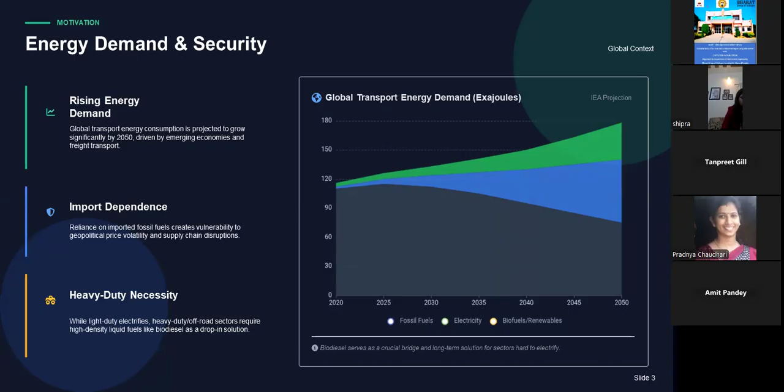So here we have a graph which clearly shows the energy demand. Rising energy demand: global transport energy consumption is projected to grow significantly by 2050, driven by emerging economies and freight and transport. Import dependence: reliance on imported fossil fuels creates vulnerability to geopolitical price volatility and supply chain disruption. Heavy duty necessity: while light duty electrifies, heavy duty and off road sectors require high density liquid fuels like biodiesel as a drop-in solution.

So, resource depletion. Here we are discussing a few flaws with diesel: finite fossil reserves. Conventional petroleum reserves are finite and geographically concentrated, creating long-term supply instability risk. So as the demand and requirement increase, we have a risk that the long-term supply will not be available for this fuel.

Feedstock diversification: the ability to utilize diverse biomass sources like waste oil, animal fat, and non-edible crops like jatropha and camelina. Rural development and value chains: localized production supports agricultural economies, creates jobs, and reduces dependence on foreign energy imports.

So we have a few points regarding air quality and climate. Here we have a graph that clearly shows that biodiesel produces less pollution compared to petroleum diesel.

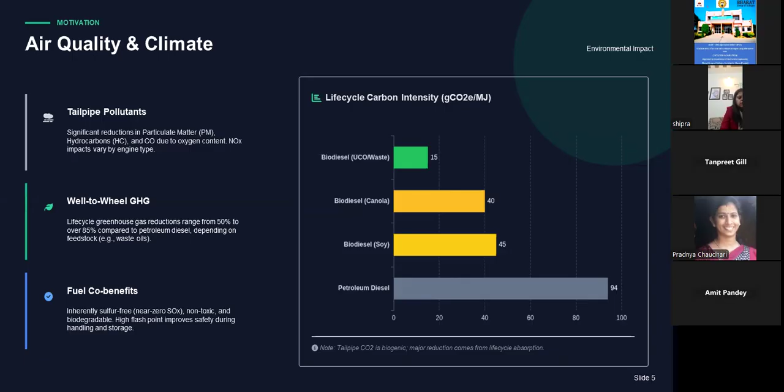So let us discuss petroleum diesel. Petroleum diesel is a fossil-derived mixture of hydrocarbons, primarily paraffins, cycloalkanes, and aromatics, and contains no oxygen. Biodiesel, fatty acid methyl ester, is produced via transesterification, an oxygenated fuel strictly defined by standard ASTM

D6751 or EN 14214. So here one thing we have to discuss is the process of transesterification, where fatty acid methyl esters are produced when alcohol is reacted with edible or non-edible oils. We have some conditions that we will discuss later.

Also, biodiesel has oxygen, which is very useful as it is an oxygenated fuel, helping to combust carbon monoxide completely and convert it into carbon dioxide, which reduces pollution. Renewable diesel, HVO, hydrotreated vegetable oil, is a distinct paraffinic fuel chemically similar to petroleum diesel, not FAME, that is biodiesel, often called green diesel.

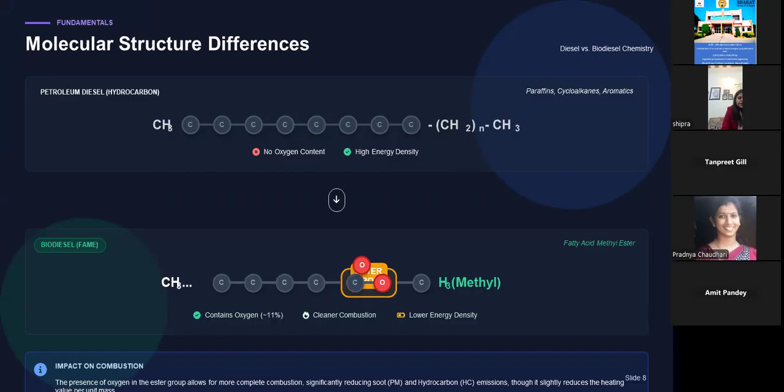So here is the molecular structure for petroleum diesel and biodiesel. Biodiesel contains oxygen, and this extra oxygen will help to reduce the pollution. Here we can see that biodiesel has many significant differences, for example viscosity. Diesel has 2.0 to 4.5 and biodiesel has 3.5 to 6. That is higher than diesel, right?

If we talk about cetane number, the greater the cetane number, the easier the ignition. So we can say it has a better cetane number also. Diesel has 40 to 55, but biodiesel has 47 to 65, which is quite better. It also improves ignition quality. So these are some properties that we can compare.

And the most important thing we can discuss here is oxygen content, which is zero in diesel and near about 11% here, which makes it cleaner. Biodiesel has 11% oxygen, which makes it a cleaner fuel. It also helps complete combustion so that the residue converts into carbon dioxide rather than carbon monoxide.

Also, biodiesel doesn't have any sulfur, so we can say it is sulfur free. It will help to negate SOx emission, sulfur oxides emission. So that makes it a better option for a fuel. So here we are going to discuss feedstocks and production. The production will also explain the process of transesterification that I discussed earlier.

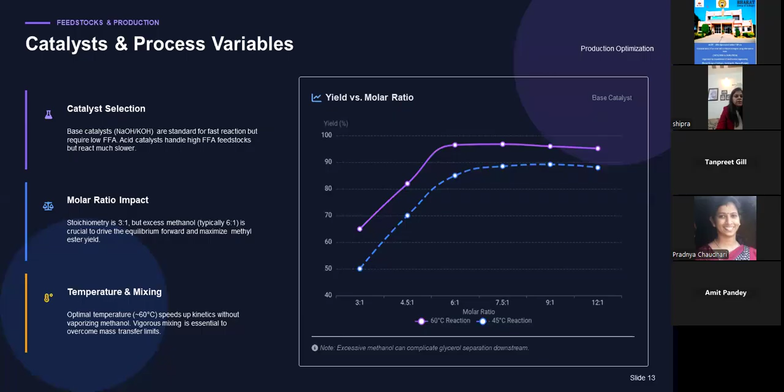Catalysts are required for the process. Base catalysts, sodium hydroxide or potassium hydroxide, are standard for fast reaction but require low FFA. Acid catalysts handle high FFA feedstock but react much slower. Molar ratio, temperature and mixing have an impact. The temperature required is 60 degrees Celsius for this reaction. We get byproducts, and we have to manage these products and quality control.

So byproduct management consists of glycerol separation, which is a must from the biodiesel we get from transesterification. It should be removed, as greater than 98% purity is required. Crude glycerol often contains methanol and soaps. Soap formation, caused by free fatty acids reacting with the base catalyst, must be split or washed out. So this is the basic process required.

Methanol recovery is also required here. Excess methanol is distilled and recycled to improve the economics. Next we have the purification process. Wet washing uses water to remove soap, catalyst and glycerol, and generates wastewater. Dry washing uses ion exchange resin or adsorbent and reduces water use.

Polishing is final filtration to remove micron-scale particulates and moisture. Quality assurance: ASTM D6751 or EN 14214 are the standards for biodiesel, strict specifications the final fuel must meet before blending. Reaction completion is measured by total glycerin, mono-, di- and triglycerides remaining, and a flashpoint check ensures methanol has been adequately removed.

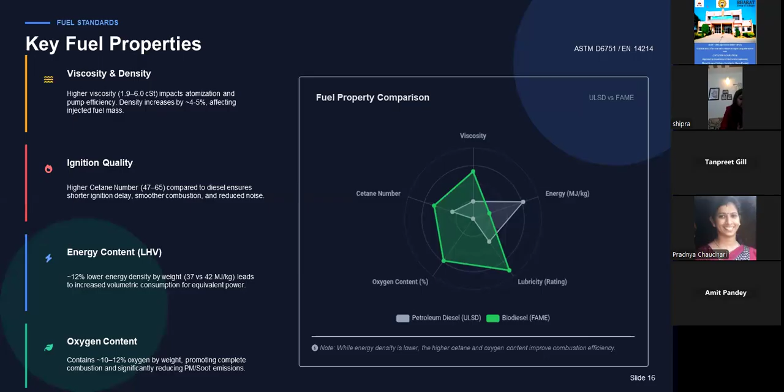We have a few important parameters, including free glycerin, water content, acid number, metals like sodium, potassium, calcium, and oxidation stability. Poor quality biodiesel can cause injector deposits, filter clogging, DPF ash accumulation, or warranty voids also. Biodiesels and handling we are going to discuss.

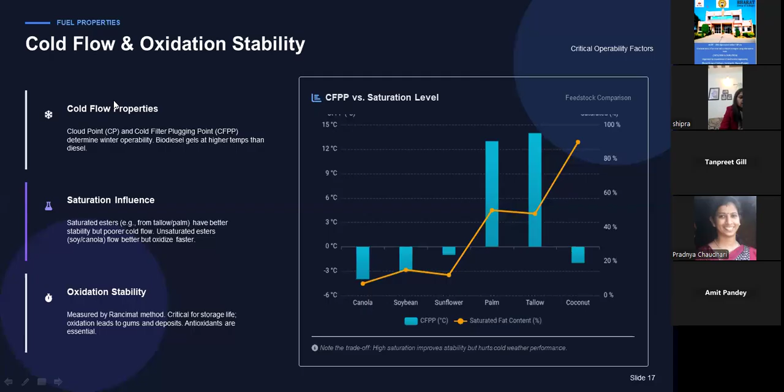So here in this slide we can see cold flow properties, that is cloud point, CP, and cold filter plugging point, CFPP, which determine winter operability. Biodiesels gel at higher temperatures than diesels. Saturation influence: saturated esters have better stability but poor cold flow. Unsaturated esters like soya or canola flow better but oxidize faster, which is again an issue to discuss. Oxidation stability is measured by the Rancimat method, which is critical for storage life. Oxidation leads to gums and deposits. Antioxidants are essential.

So we have a few standards. Let us discuss first pure biodiesel, that is B100. That standard is ASTM D6751, USA or Canada. It applies to pure B100 prior to blending and focuses on the physical properties and contaminant limits. Second is EN 14214; Europe is using the FAME standards, stricter on oxidation stability and iodine value, which limits some feedstocks. Here in India, IS 15607, national standards adapted for local feedstocks like Jatropha and Karanja.

So we have critical differences: iodine value, EN 14214 caps at 120, ASTM has no limit; and cetane number, EN requires minimum 51 and ASTM requires minimum 47. Blend specifications are also discussed here. ASTM D975 standard diesel allows up to B5, 5% biodiesel, as a generic component, while ASTM D7467 covers blends from B6 to B20, crucial for fleets using higher blends. EN 590, the EU automotive diesel standard, caps FAME content strictly at 7%, that is B7.

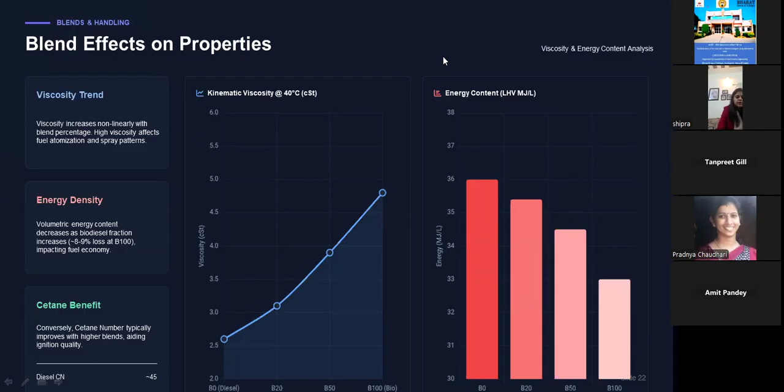Storage and handling. Also, we have to consider that biodiesel absorbs moisture easily. It has limited storage life, that is, we can use it for 6 months only, and it cleans old diesel deposits from tanks. So these are major issues that we have to consider. Proper storage practice includes keeping the fuel dry, avoiding copper and brass, using antioxidants, and regular filter checks, which is very important to keep in mind when using biodiesel.

So now we are going to discuss engine performance. This graph completely describes all the properties and also compares the trends. BSFC, that is brake specific fuel consumption, increases with biodiesels because of lower heating value. For B100, BSFC may increase by 10 to 13%. BTE, that is brake thermal efficiency, remains nearly the same or slightly improves due to better combustion.

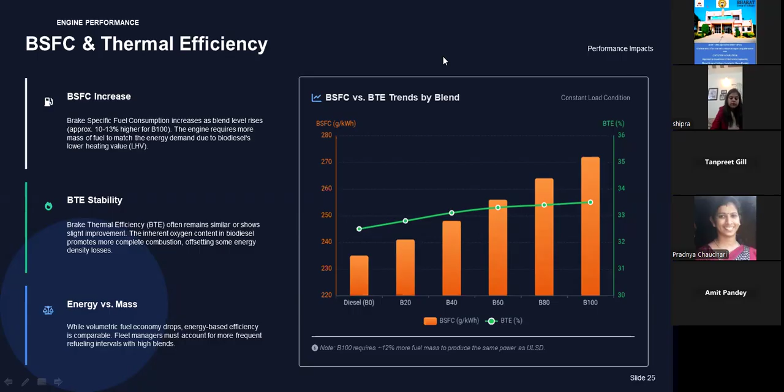So here we are discussing power and torque outputs. Energy content drops. Biodiesel has 10 to 12% lower heating value (LHV) than diesel. That theoretically reduces the peak power if fuel volume is constant. Density compensation: higher density results in greater injected mass per stroke. Net performance impact: B20 typically shows negligible loss, that is less than 2%. B100 may show 5 to 8% reduction in max torque or power without any recalibration.

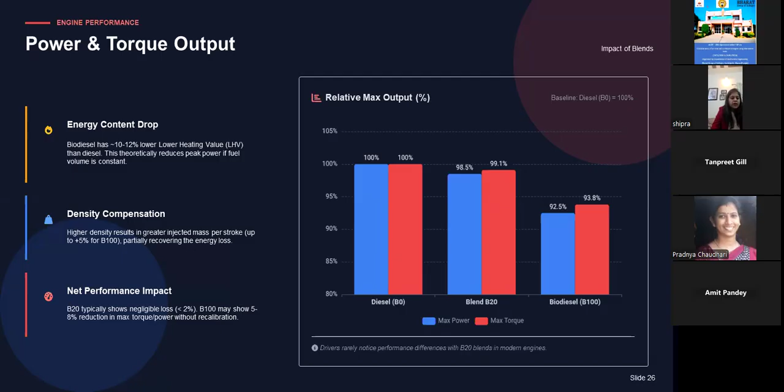Biodiesel has a higher cetane number, that means shorter ignition delay, earlier combustion, lower combustion noise. Heat release rate shows a lower premix combustion peak, smoother pressure rise. Biodiesel allows better control of the soot-NOx trade-off, especially when combined with EGR and optimized injection timing.

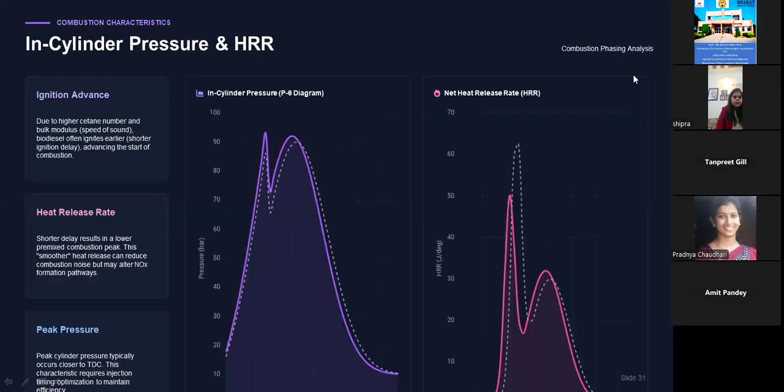Before going further, let me summarize the last topic we were discussing here: combustion characteristics. Biodiesel has a higher cetane number, as we have already discussed. So it will give shorter ignition delay, earlier combustion, lower combustion noise. We also get the benefit that heat release rate shows a lower premix combustion peak and smoother pressure rise. Biodiesel allows better control of soot, especially when combined with EGR or optimized injection.

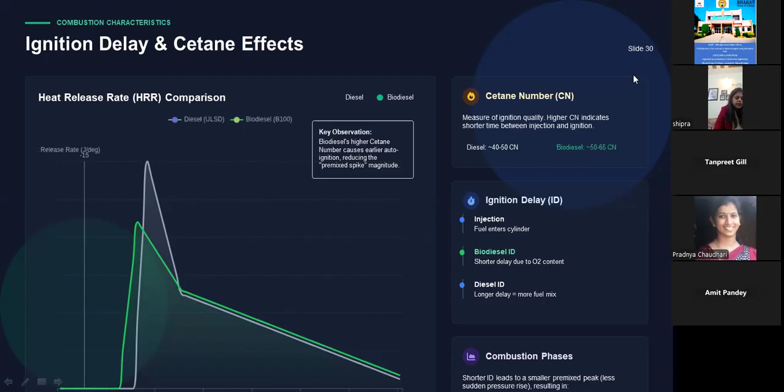So then we were discussing emissions and environment. These are the emissions that we get with biodiesel: particulate matter, hydrocarbons, carbon monoxide, nitrogen oxides, sulfur oxides.

So if we are talking about particulate matter, it definitely decreases in biodiesel if we compare with diesel. Oxygen content promotes complete oxidation, and lower aromatic content reduces soot precursors. Hydrocarbons decrease as compared to diesel, as a high cetane number leads to shorter ignition delay and better combustion efficiency.

Next parameter, another pollutant that we get in diesel combustion, is carbon monoxide, which decreases in biodiesel combustion. As we have discussed, extra oxygen is there to convert carbon monoxide into carbon dioxide. So oxygenated fuel structures ensure more carbon is fully oxidized to carbon dioxide.

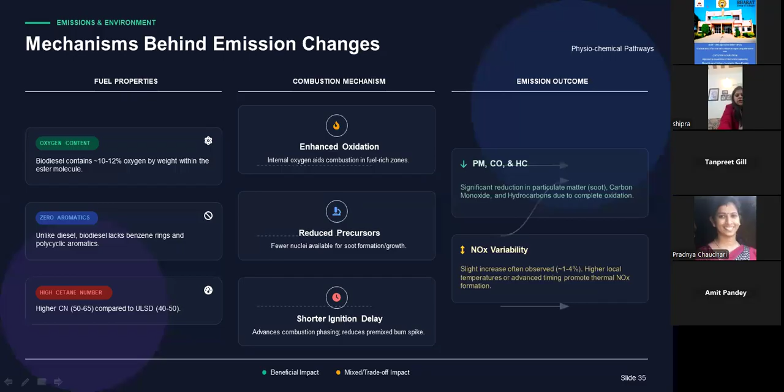DOC reaction interactions. Biodiesel oxygen content leads to lower engine-out HC or CO, that is hydrocarbons or carbon monoxide, reducing DOC load. Lower sulfur content prevents catalyst poisoning and sulfate formation. Exhaust temperature may be slightly lower, potentially affecting light-off time.